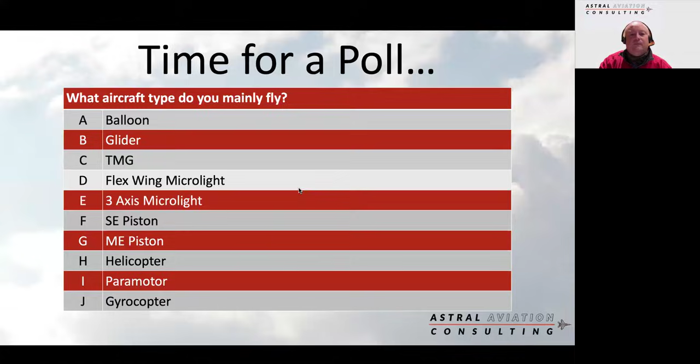And if we could have a look at the results, please. Brilliant, so lots of single engine piston. Great to have some of our microlight and glider, TMG community, some MEP, and quite a few from the gyrocopter community again with us this evening. That's brilliant, everybody is welcome, and we hope we will cover all perspectives and welcome perspectives from everybody there as well.

So the first section is about autopilot and trim runaways. Just to answer a comment before we get into this - somebody's saying people can see the link but can't actually post in it. Sophie will be working on that in the background, but we'll keep pressing on for now. So we're going to start this topic with a poll, just to get you thinking about this as well. So if we can have this poll on here, please.

So a little bit more wordy, these polls tonight, but hopefully get you thinking a little bit there as well. So in the event of an electric pitch trim runaway, especially at low altitude, what do you think is the most critical action to take?

We've got a few options here as well. Immediately pull the master switch circuit breaker, maintain and control, and disengage autopilot/electric trim. Immediately select full opposite pitch trim to counteract the runaway, or check the flap position and adjust as necessary. What do people think? Give people just a few seconds to read that.

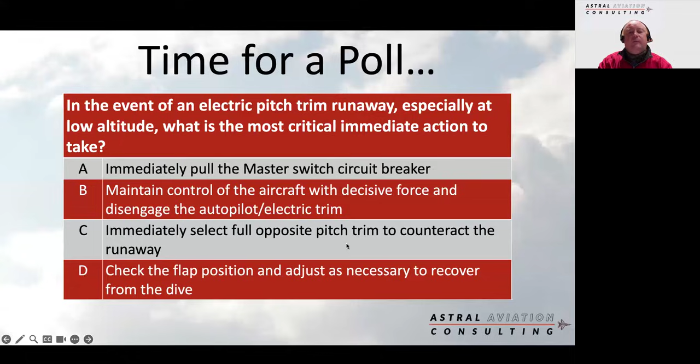Okay, let's have a look at results. Let's see what people think on this one as well. So the majority of people have gone for B, maintain and control the aircraft. And that is the answer we were looking for there as well.

The master switch - we'll come on to this and discuss it as well. There's lots of circuit breakers, there's lots of switches for different systems. So what we're going to do is discuss this a bit more, but really the answer we're looking for is the second one there, maintain control and disable the autopilot or electric trim. Look out for that theme because we're going to discuss it a bit more.

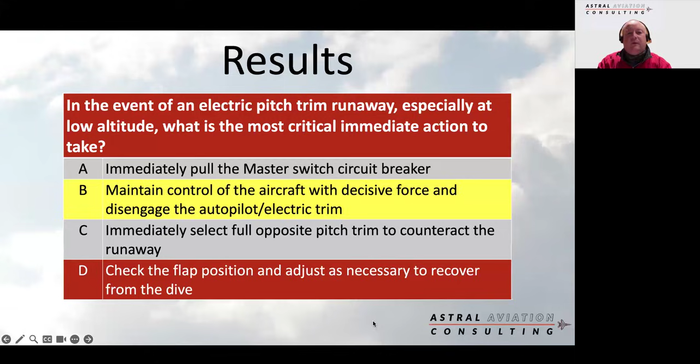So the case studies we're going to discuss today do relate to some accidents and some AAIB reports. Some of them are sadly fatalities, and if some of you are involved in these accidents, our condolences. But we're not attributing blame. We're not trying to comment on the abilities or the decisions of anybody here. What we're trying to do is use these AAIB reports and use the lessons and recommendations that came from them to have a safety discussion and maybe all take away some things we can think about for our future flying. So if you do know more about the accidents, please take it in the spirit that it's intended.

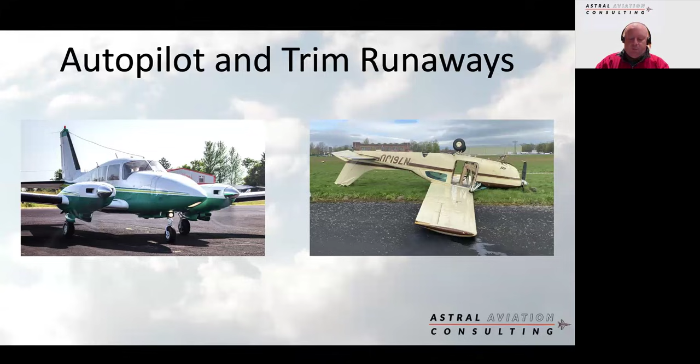We're going to look at two AAIB investigations, and these really highlight how trim and autopilot malfunctions can rapidly become really problematic. There's two aircraft, two reports there as well.

So the first one is Golf Bravo Kilo Juliet Whiskey. This accident happened in July 2023 near Bagby Airfield. It's an Aztec. The pilot was returning from Ireland after a long multi-sector day, and everything looked routine until the aircraft turned on right base for runway 06. Now, radar and CCTV that they found and used in the report showed a progressively steepening descent. The aircraft suddenly entered a 30 to 40 degree dive from around about 1,000 feet, and they didn't see any attempt at recovery. The aircraft sadly struck trees and terrain almost wings level, and there was a quite severe post-impact fire.

Now, what they found during the investigation was that the pitch trim drum was found 3 millimeters from the full nose down position, so it's pretty much all the way full nose down. Investigators did consider whether this was due to post-impact movement, but they also noted it was more nose down than any expected trim settings for the speeds observed on CCTV. So a trim runaway, possibly related to the inoperative but partially functional autopilot, was considered the most likely cause. But they couldn't 100% prove it because of the nature of the wreckage.

Now, the autopilot in this aircraft was placarded inoperative, yet it was still partially powered. The aircraft also lacked a yoke-mounted autopilot disconnect switch, and the relevant circuit breakers were low and out of sight. The pilot hadn't completed differences training on the Aztec as well, which may have been a factor. So in essence, they think at low altitude, a pitch trim excursion left the pilot with insufficient time or leverage to recover. That's the first case study that comes out.

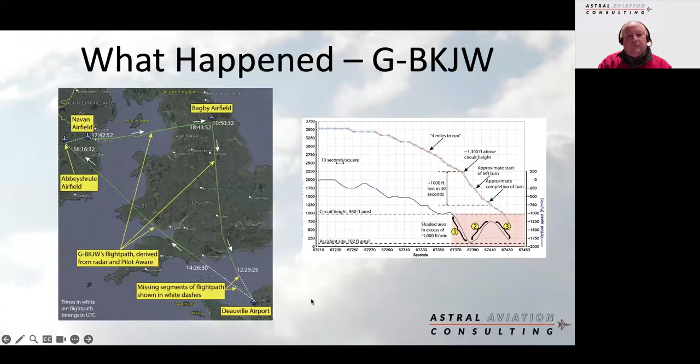Now, the second one, before we discuss some of the takeaways and learning points from these, is an American-registered aircraft, November 761 Juliet Uniform. It happened at Leeds East in April 2024. The pilot had flown 2 previous legs that day, and it had some intermittent autopilot trim warnings. But on the final departure, during the takeoff roll at about 70 knots, the pilot attempted rotation, but the control column wouldn't move.

He rejected the takeoff, but as the power came off, the aircraft briefly became airborne. With full nose down trim set, the pilot couldn't hold the nose up. The aircraft bounced, the nose gear collapsed, and the aircraft inverted. Sadly, the passenger later died from injuries, but the pilot survived. Now, the elevator trim in this case was found fully nose down. The autopilot system had some intermittent faults, and it was capable of driving the trim wheel fully without the pilot noticing. Now, the autopilot engage switch was found in the on position by the fire crew.

So they believe that the autopilot was actually on. This accident highlights how an unnoticed trim position, or the trim being driven by a faulty autopilot, can produce a situation where the aircraft becomes uncontrollable, very low level, very quickly, at quite a critical moment.

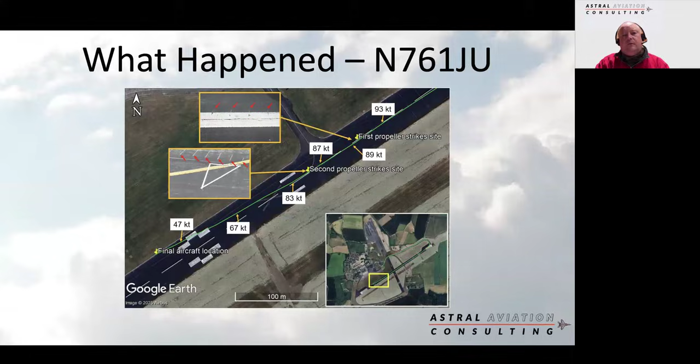So there's two accident case studies, quite topical ones, quite recent ones, all involving kind of trim and autopilot potential issues. I'm going to hand over to Phil now to talk about some learning points from there. Yeah, over to you, Phil.

Thank you. Thanks, Matt. So some learning points from those then. Knowing how the system operates, it's really important to understand the manual, electric, and auto trim modes, how they operate, and how they interact. If that's not something you've gone over recently, it's a good idea to have a look at.

Knowing where these circuit breakers actually are and how to get to them instinctively is so important. I've only had one of these for real, in the last aircraft I flew, a 747, a freighter version. The two trim cutout switches were immediately obvious, big red covered switches, huge things, easy. In the aircraft we're talking about, that we fly, they're not that easy to identify, and it's so important to know where they are and be able to get to them quickly.

It's also worth just thinking about what the force is going to be like. The manual force when the system fails can be quite a lot, especially in older aircraft, and they happen quickly. They can be overwhelming, and it definitely creates startle.

So for me, a big learning point from this, or something to think about, is how we self-brief, or brief someone else if we're flying together, and bring trim runaways into our TEM briefings. Just think about the startle it's going to cause, especially if we're in a critical phase of flight, low to the ground — how are we going to deal with that?

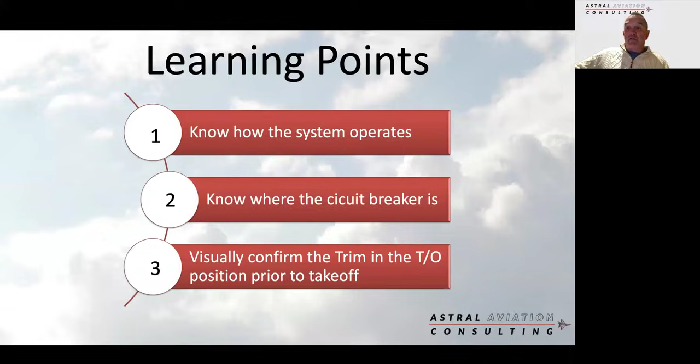Remembering that a trim runaway can happen at any time. So if you feel that force increasing, suspect it is a trim runaway. Fly the aircraft and get to that circuit breaker.

Next slide, please. There we go. So the immediate actions for a trim runaway: attitude, you're going to hold that and expect heavy forces. So we're going to fly the aircraft first.

Autopilot, going to get that disconnected. Trim movement, going to stop by pulling the trim circuit breaker, and back to that all-important bit of knowing where it is and getting to it instinctively. Retrim manually, and then back to aviating — flying the aircraft, power, pitch, and stabilize.

Both reports show that a disabled or placarded autopilot can still have a partial function. So if it's unserviceable, pull the circuit breaker and make sure it is isolated before flight. I fly the 330 now at Virgin, and that's one of our pre-flight checks — any placarded item, if it has a circuit breaker associated with it, that circuit breaker is pulled. That's a really important one to do.

And just of note, the AAIB and the CAA highlighted the need from these incidents for formal differences training to include autopilot and electric trim systems, improved visibility for circuit breakers because they can be so difficult to identify, and reinforced maintenance requirements for older autopilot systems.

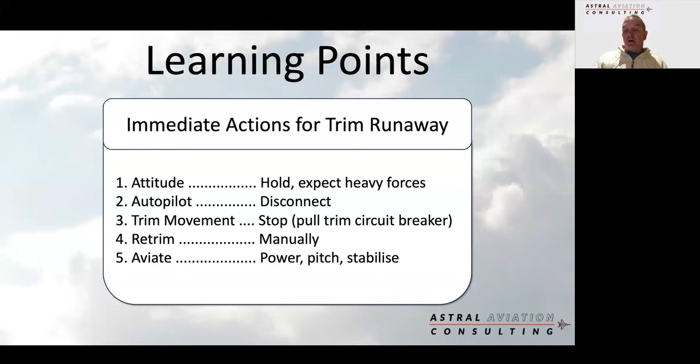Both events sadly were preventable. The underlying issue in each case was trim mismanagement driven by autopilot faults or incomplete checks. Awareness and training are the primary defences here. Autopilots vary enormously in age, reliability, and integration. Many have limited warning systems. If you don't know exactly how yours behaves, you cannot safely use it. Human factors, fatigue, workload, expectation bias, played a role in both these accidents. Trim systems fundamentally change the aircraft feel, and any unexpected force is a warning sign.

So three golden rules here. Number one, eyes on trim, visual and tactile confirmation. Number two, disconnect first, diagnose later, if anything feels wrong. And three, know your breakers, trim and autopilot, and be able to reach them instantly. Have them marked in a different colour or collared can help you get there quickly.

In addition to the CAA guidance already available online, the CAA is looking at promoting further safety material on this topic during 2026, which will be promulgated via Skywise. Okay, let's move on to our second theme, which is fuel.

Thanks, both. I'll just pick up a few queries and questions from this as well. A few people have commented on having red rings or red or even different coloured collars around the CBs, and that is very much what they're recommending from the AAIB report.

Get you engaged again, so let's have another poll. I'm glad the chat's back working as well - Sophie, I don't know, kicked the computer or did lots of things in the background, so thank you for getting that working again, Sophie.

Here we go, poll 3. You arrive at the aircraft, it's been parked outside, you drain the left wing, the sample tube's completely full of a clear liquid, smells faintly of avgas. What's the best course of action? So you've drained your tank, got a load of liquid out, had a good sniff of it, smells of avgas. Options: accept the sample, drain another sample, continue draining, or start the engine and check for normal running. What do people think?

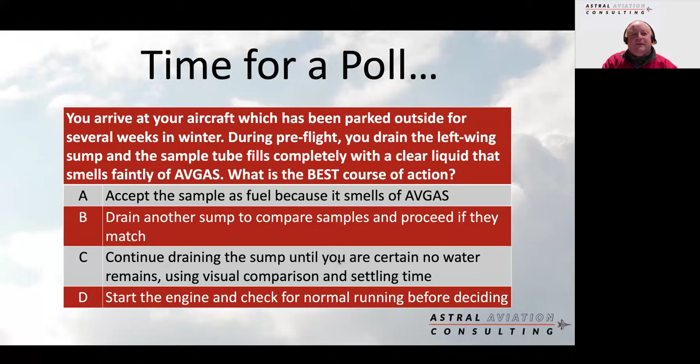Hopefully people have had a chance to read through there. Let's have a look at the answers for this one - what have most people gone for? Yeah, 95% say continue draining the sump until you're certain no water remains, using visual comparison and settling time. Brilliant, that's exactly the answer we were looking for, and we're going to discuss with another case study why.

Right, so this next accident report is based on a special bulletin, so the full accident report hasn't been out yet. A few of us, myself and Charlotte, have been down to the AAIB and discussed this with the investigators and seen some of the actual factors involved. It's November 4698 Whiskey, a Rockwell Commander - a pretty punchy, pretty powerful aircraft.

It suffered loss of power on climb out due to severe water contamination in the fuel. The aircraft departed Fife on the 24th of December 2024, and CCTV showed the pilot arriving, conducting pre-flight checks, and then taxiing out. He had the engine running for about 20 minutes, suggesting a warm-up or extended check. Takeoff began just after 11:30, but less than a minute into the initial climb, CCTV footage shows the aircraft abruptly departing controlled flight into an incipient spin.

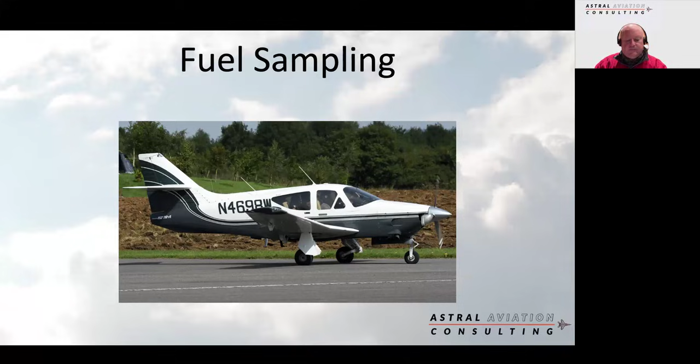At the same time, interestingly, CCTV in a nearby village recorded the engine misfiring. The pilot got out a brief mayday call, but the aircraft sadly struck rising ground near Kinglassie, and the pilot did not survive. At impact, the landing gear was retracted, the propeller was windmilling, and there was no fire - so investigators were quickly able to determine it was a fairly sudden loss of power rather than some kind of incipient mechanical failure.

The investigators found significant water contamination throughout the fuel system. In the carburetor alone, enough water was present to cover the main jet inlet, and the engine was effectively ingesting water rather than fuel - so it was quite a significant power loss.

Importantly, the AAIB found - and this is where the investigation is going to go - that even a full sample tube of water could still smell of avgas, and Charlotte's going to touch on this more. This is a really key learning point, and then Phil will give us some takeaways. So over to you, Charlotte, to give us some learning points on this one, please.

Okay, firstly, this was not mechanical failure - the ignition system and engine components checked out correctly. The root cause was water contamination, which entered the fuel system sometime before the flight. The Commander 112 has multiple sump drains, two per wing tank plus the gascolator, and the POH requires draining all five points and repeating these drains until no water is present.

If water is found downstream, such as in the gascolator, the wing and wheel well drains must be re-drained repeatedly. In this accident, enough water was present that even after one drain, subsequent samples might still contain water. The AAIB notes that pilots sometimes rely only on smell, but as we've seen here, a tube of pure water can retain a noticeable avgas odour if the tube was previously used for fuel. Fuel samples must be assessed primarily by sight, not smell, as water will always separate and sink to the bottom.

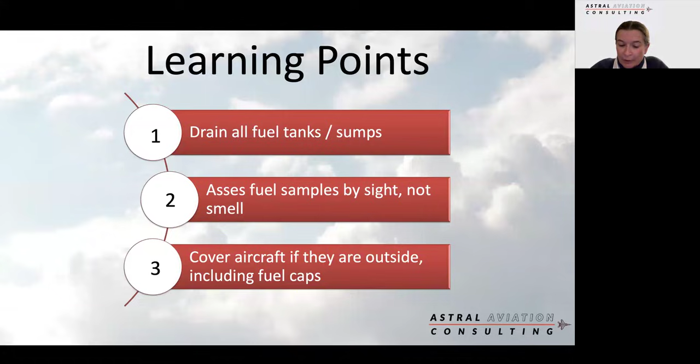In this case, the aircraft had been outdoors for 7 weeks with only the cockpit covered. Fuel caps had recently had seals replaced, indicating previous water ingress concerns. This should have been an indicator to increase the need for repeated fuel sampling, particularly prior to the first flight in a while.

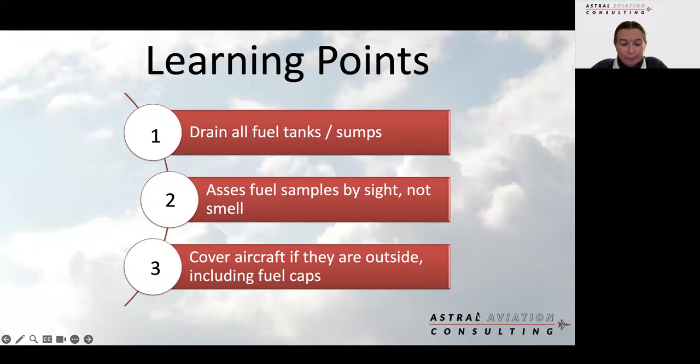Also note that the handling after the engine failure contributed to the accident outcome. The aircraft entered a stall or a spin after power loss, reinforcing the importance of flying the aircraft above all else in an engine failure after takeoff situation. Immediately pitch for glide speed and then assess what options are available.

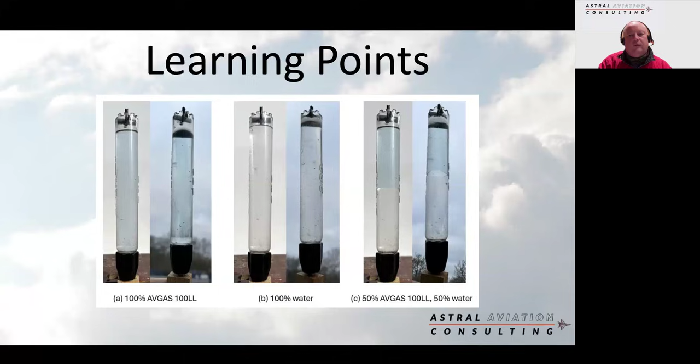But let's talk about these takeaways, Phil. Yeah, so thanks, Matt. So yeah, this incident underscores a real critical message, right? That water ingress is one of the main threats to piston aviation. It's not that long ago, last year, I walked out to a PA28 which had both of its fuel filler caps off. They've been off all night. That was a really easy one to spot. But water ingress can happen, as Charlotte was alluding to, in much more insidious ways, meaning that even well-maintained aircraft flown by experienced pilots can be brought down by water that goes undetected pre-flight. So it's that pre-flight stage that's going to really save us.

So, 3 key takeaways. First, drain all fuel sumps visually, repeatedly and thoroughly. If water is found in any location, you've got to keep draining until that is entirely clear. Secondly, do not rely on smell. A full tube of water can still smell of fuel, especially in flying clubs where the tubes are used all the time - those tubes would still smell of fuel even after being in the washing machine 20 times. So you just can't rely on the smell.

And thirdly, remember that we need to take fuel samples prior to refuelling the aircraft, since the act of refuelling is going to mix that water and fuel, meaning that the samples will not necessarily show water. It takes approximately 20 minutes for the water to sink through the fuel to the bottom of the tank, which is the area where you're going to drain it and detect it. So the sample has to be taken prior to refuelling.

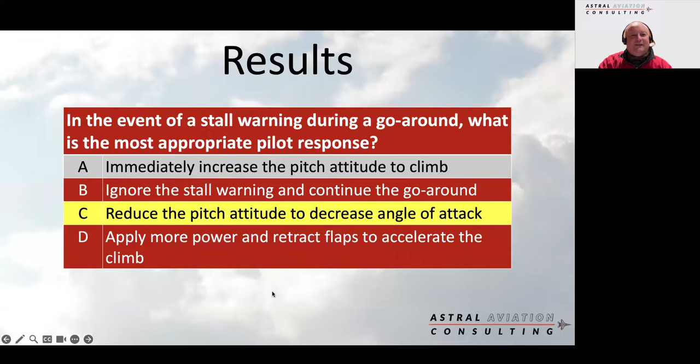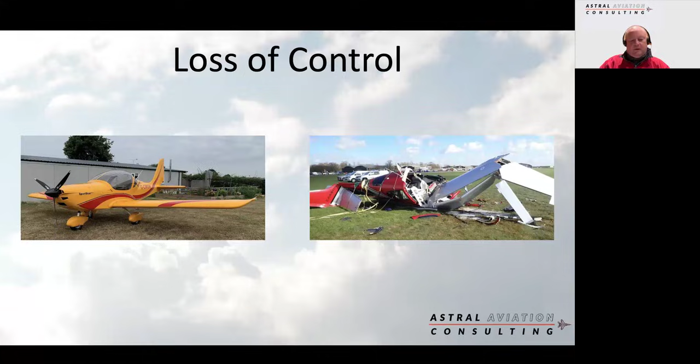So, loss of control, there's two case studies here. Some of you may know more about these, but let's have a look. The first one is a Cirrus, Golf Romeo Golf Sierra Kilo. If you want to Google or look at the link, the pilot had 115 hours total time, 16 on the aircraft type, and he was flying some circuits practice.

His first two touch and goes were quite normal, but on the third, the aircraft bounced on touchdown. The data shows, and they've got data from various sources, various engine management and other sources around, and they had some CCTV, as you can see. Power was briefly reduced, but then full power was applied. Full flap was still selected.

The nose pitched up further, it then rolled and yawed left, continued to turn until the bank exceeded 90 degrees. The wing entered a fully stalled condition for the final 5 seconds of flight, and the aircraft struck the ground, sadly, approximately 40 meters from the runway. The CAPS, the Cirrus parachute system, did deploy, but that was due to the breakup sequence because the activation cable was damaged. So, yep, go around and full power loss of control.

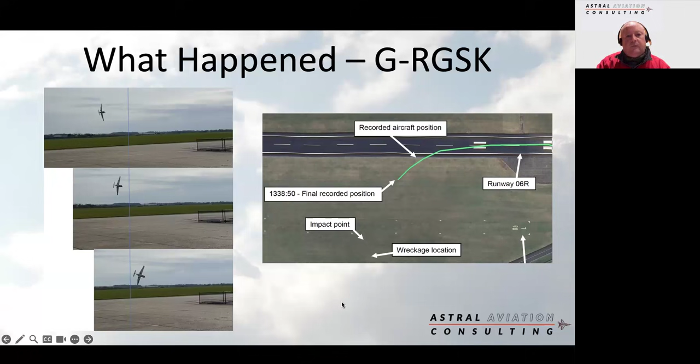So quite sad, very close to the runway. The second accident is a SportStar, Golf Charlie Mike Golf Bravo, if you want to Google that. It departed Coal Aston in what were actually marginal weather conditions. Lots around this, around weather forecasting, getting information, and whether the pilot knew he was departing into marginal conditions, we don't know. But CCTV at departure showed visibility as low as 400 to 600 meters with low cloud around.

After takeoff, the pilot flew multiple orbits, changed altitude repeatedly, and then tracked south towards Chesterfield. Some ADS-B recorded data shows the aircraft climbing and descending in IMC-like conditions, with effectively the aircraft entering cloud mainly. Witnesses saw the aircraft entering into cloud, re-emerging low, and then climbing steeply back. So this poor pilot was obviously desperately trying to get into VMC conditions.

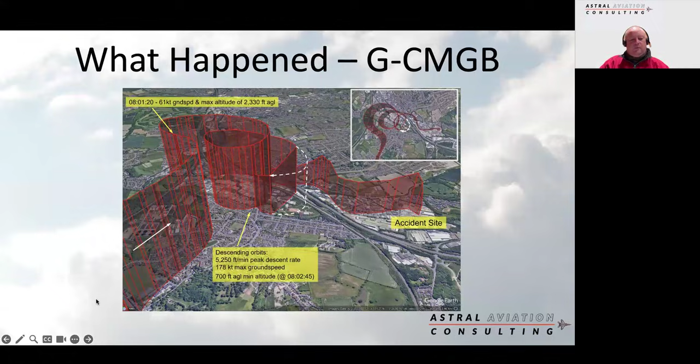But over Chesterfield, the aircraft entered a series of descending spirals. Some of the rates of descent were over 5,000 feet a minute, and then finally it was over 11,000 feet a minute descent in a steep right rotation. Tragically, it impacted an industrial estate. So another loss of control, but quite different to the first accident. Let's see what points we can get out of these.

Moving on, over to you, Phil. What points? Two quite different accidents here, but yeah, what points can we take out? Maybe some common points. Yeah, no, indeed, very different accidents.

So, the first one, it's low speed, high angle of attack, and that rapid application of power. I fly the Cirrus from time to time, and it does have strong left turning tendencies when power is applied. At low speed, obviously with the flaps out, high pitch, these forces are amplified, and a significant amount of right rudder is required when you're increasing power. The Cirrus training manual emphasises smooth application of power over 4 to 5 seconds, immediate right rudder to counter yaw, and pitch just above the horizon to stabilise, then clean up to 50% flap.

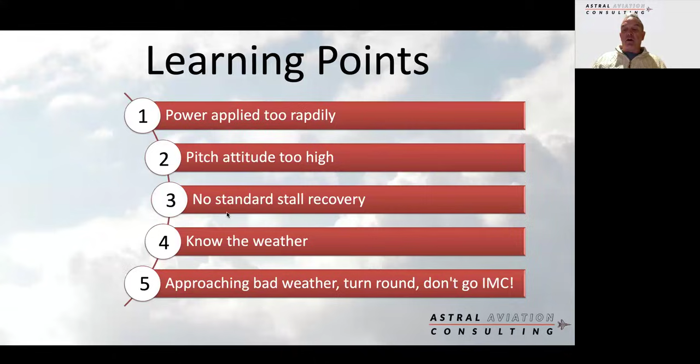In this incident itself, power was just applied too rapidly with insufficient rudder, and the pitch attitude stayed too high with a stall warning on throughout. It's important, even in these serious, very advanced aircraft, to emphasise just the absolute basics of looking at the front, balancing any yaw with rudder, and selecting the appropriate nose attitude, and you will be okay.

In this incident as well, the pilot recency was an issue, so hadn't flown for 54 days. Clearly this incident is going to induce startle and potentially over rotation. So being really defensive about our recency, I think, is important.

Complacency as well, or skill fade. We see this a lot in the airline industry. Cirrus puts in a yaw damper for above 200 feet, meaning during normal flight you don't really need to use the rudder. If you fly an aircraft like this, what we often talk about in the Airbus world, which is full of this stuff, is to try and stay engaged with the airplane. So while in a Cirrus you don't need to apply the rudder once the yaw damper is in, make sure you stay engaged with it and know what the airplane is doing so you don't lose that motor skill yourself. So power applied too rapidly, pitch attitude too high, and no standard stall recovery applied.

Moving to the SportStar then, so he's an experienced pilot, but with limited or no IMC experience. His PPL syllabus didn't require him to do instrument flying, and he was therefore vulnerable to loss of spatial awareness in cloud.

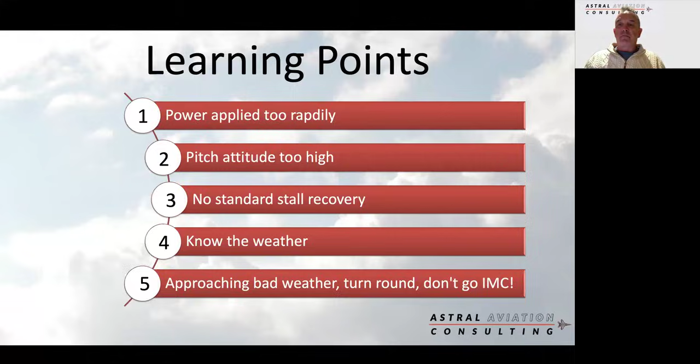Thanks, Phil. Yeah, so takeaways from these. Both accidents highlight the importance of maintaining control and flying the aircraft. The Cirrus accident demonstrates how quickly a go-around can deteriorate when pitch, yaw, and power are not managed together. A full flap go-around requires precise control, applying the power smoothly, especially if you've got a lot of it, as in this case, and controlling pitch to prevent excessive angles of attack, using appropriate rudder, in this case right rudder, to prevent yaw as the power is applied.

Avoid over-rotation, keeping the nose just above the horizon until accelerating. Use the trim to help you. Recognise the approaching stall: nose high pitch attitude, decreasing airspeed, aerodynamic buffet, and stall warner if you have one. Maintaining recency is key, as skill fade affects decision making and motor response.

On the next slide, the SportStar accident reinforces several key safety principles. VFR minima are limits, not targets. Safe flight requires much better conditions. If the visibility is less than 5 kilometers or the cloud base less than 1,500 feet, pilots should really treat the conditions as potentially unsafe for VFR.

In IMC, we cannot rely on vestibular cues. IMC entry rapidly becomes deadly to pilots not qualified to fly on instruments. So an immediate 180-degree turn is the recommended escape maneuver. If in doubt, do not launch. Delaying the departure would probably have prevented this accident. VFR flight into IMC remains one of the most lethal accident categories, so strict personal minima and weather discipline are critical.

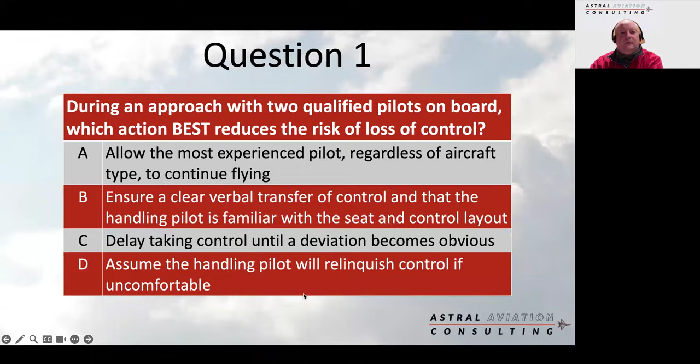Let's have a look at the answers, please. Yeah, 89%, clear verbal transfer of control. The handling pilot is familiar with the seat and control layout. So that's what we're after here. Clear command authority, explicit 'you have control, I have control' calls, and seat-specific familiarity are critical, especially close to the ground. And if people think, where on earth have you got this from?

There's a GROB 109 TMG accident report that came out fairly recently, where there was confusion about who was pilot in command, who was flying, and also the person that actually performed the landing was unfamiliar with some of the controls and the seat they were sat in as well. So it does happen out there. It can be a trap that we can fall into.

Phil, have you ever had any handover, takeover of control dramas in your career? Yeah, a couple, in very high workload situations. Usually, I think probably mine on the Hawk, instructor on the Hawk, when there's been moments when neither person has been flying the aircraft, or thought the other person was, and in the debrief when you looked into exactly what it was, those first few words there: ensuring clear verbal transfer of control, and not just assuming that the other person is flying it. Thankfully not too many, but yeah, some that spring to mind.

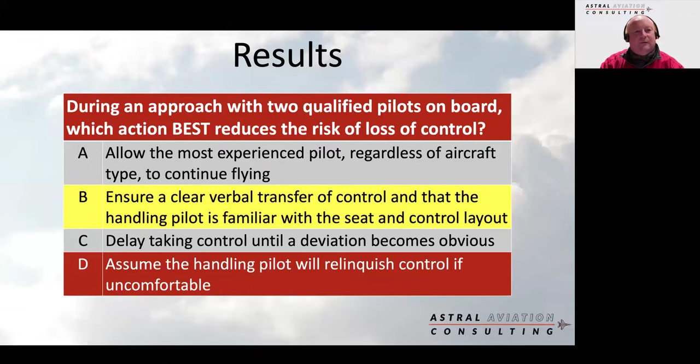Right, question 2 of 5. So for this one, please. And some people are commenting about, yeah, if you can't see the other person, if it's tandem seating, gliders, or other aircraft, the verbal handover is very, very important.

So, which statement best reflects the pilot in command's responsibility when allowing another pilot to fly the aircraft? I'll let you read the answers, you can see where we're going with this. Again, this relates to the GROB 109B accident report if you want a case study on this as well.

Hopefully people have had a...

So which statement best reflects pilot in command's responsibility when another pilot is flying the aircraft? Okay, let's have a look at the answers on this one, please.

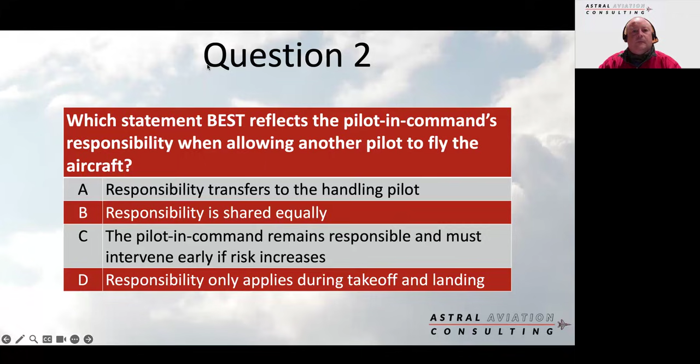Yeah, 92%. But pilot in command remains responsible. So even if somebody else is flying the aircraft, pilot in command must manage risk proactively, including limiting who flies during critical phases of the flight.

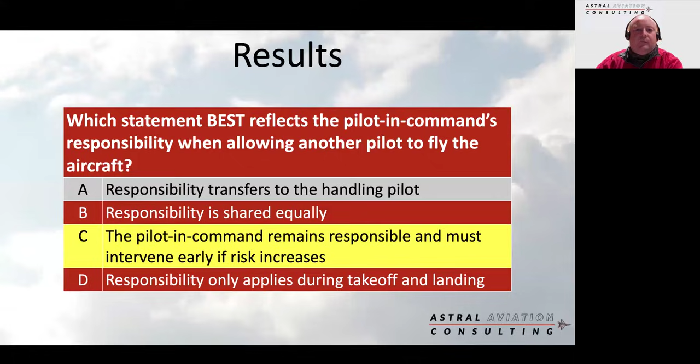In some of the accident studies that are around, people have let other people fly their aircraft during takeoff and landing, and it's gone a little bit wrong for these reasons.

Right, question 3, can we have this one please? See what people think about this one. I'll get Charlotte to comment on this one next. Right, can I have this poll up please? Why can water contamination in a carbureted aircraft cause a sudden loss of engine power after takeoff? So why is it, do we think?

Let's have a look at the answers. What did people plump for? 85% gone for it.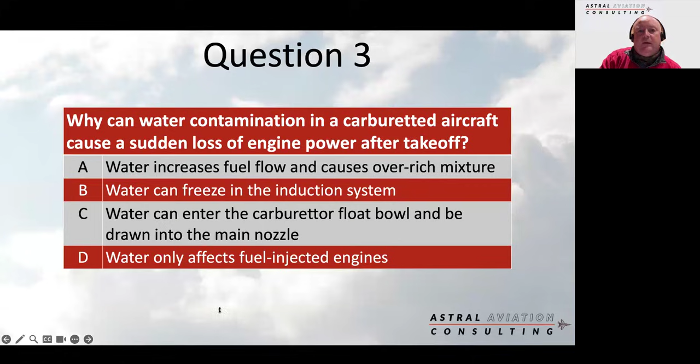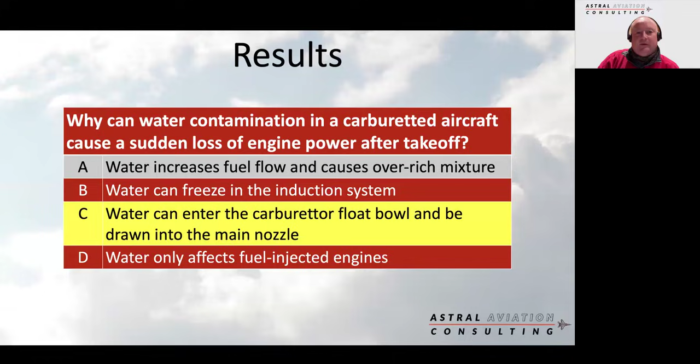Yeah, it's not so much about the induction system on this one. It's about water can enter the carburetor float bowl and be drawn into the main nozzle. You need that fuel air mix to run your engine. So there we go.

And I think this is question number 4 in our little quiz at the end. So if we could have this one up, please, Sophie.

So when power is applied during a go-around at a low airspeed and a high nose attitude, a bit like this accident we discussed in the series, what is the likely aerodynamic effect? Now, before you all start getting on to me in the chat, let's assume a typical American Lycoming type engine, i.e. not a Chipmunk, okay? So not a Chipmunk, a typical Lycoming engine, a Cessna 172, a PA-28, one of those kind of aircraft.

Yeah, clockwise rotating prop. Okay, let's have a look at the answers. What did people go for? Yeah, 90% got it right.

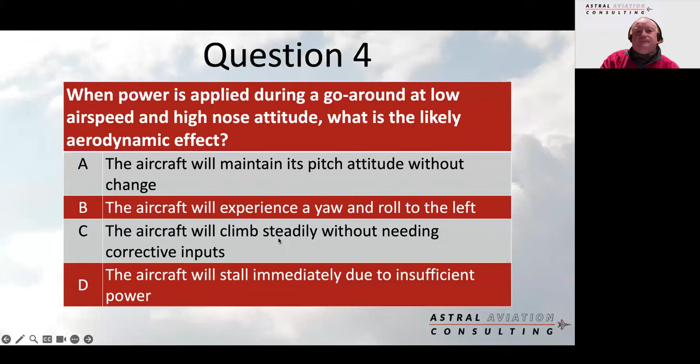So your roll to left. Yeah, good. But again, it comes down to knowing your aircraft and knowing what the aerodynamic effect of your aircraft is going to be.

What about Charlotte? You've got one very beautiful permit aircraft and one very beautiful soon to come into your purview aircraft. What do they do in terms of props and things like that, and yaw?

Is it quite noticeable? Not so much on the Chief, not a huge amount of power, but yeah, my students will be very used to hearing me say rudder a lot of the time. So it's just getting used to, as I always say, when your right hand goes forwards, take your right foot with it. In a lot of what we're teaching, it's balancing that and expecting it, being ready for it.

And what about the Gemini? Is that contra-rotating or both? No, it's not. I haven't flown it yet, so I'll get to grips with that soon. But yeah, two engines obviously gives you twice as much going on.

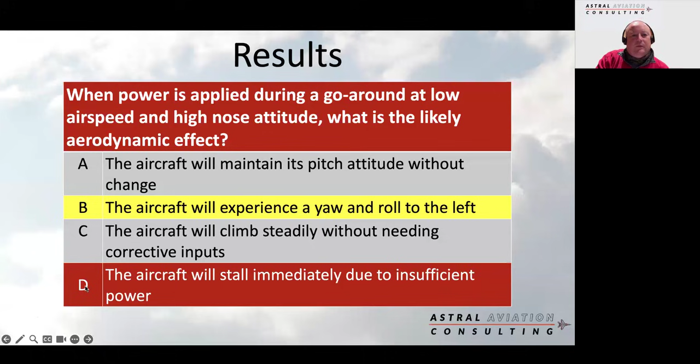So yeah, excellent. Right, let's have a look. We've got a few questions, and we will... oh no, sorry, there is one more. Actually, I didn't count very well there, did I? I was obviously wrong, there's one more.

So hopefully you'll get the theme of this from what we discussed earlier. What's the significant risk of using an autopilot that's placarded inop, even if some functions appear to work?

So have a look at those answers there. So you've got an autopilot, it's placarded inop. Some of it kind of works a little bit. This is very common. I could count many times in aircraft last year that I did tests or flew with this kind of situation, inop autopilot but bits of it work, and the pilot has said to me, well, it sort of works a bit.

So let's have a look. What do people think for the answers on this one? Yeah, majority going for underlying defects, excessive clutch override, or things going on can definitely mask an unrecoverable pitch trim or other issues.

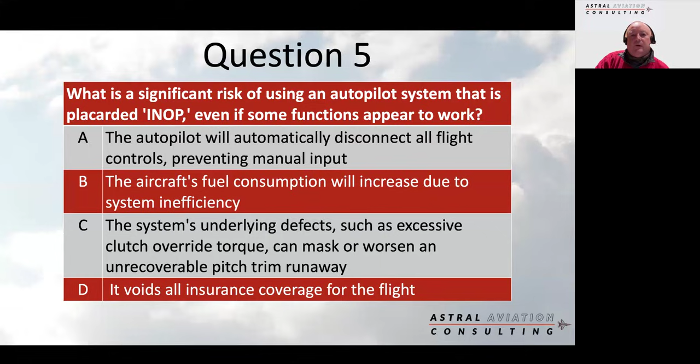And then that was, remember going back to that N-reg at Leeds East that we discussed in the case studies, that was an autopilot with various faults going on there as well. So that is definitely the answer we were looking for there. Thank you.